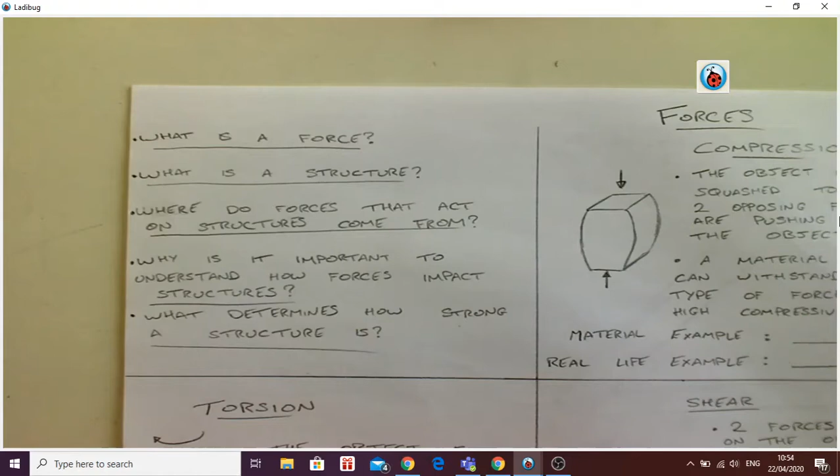So those are the 5 questions. At the end of this, you should be able to answer all of those. I want you to do that - answer all 5 questions, okay? So moving on to our first force.

My first force here is compression, right? We can see I've drawn an object - not a particular object, just a block, maybe a block of timber. The object is being squashed together from both sides. Two opposing forces are pushing against it - look at those arrows, one pushing down from the top, one from the bottom. You can see the middle of the object bulging out.

A material that can withstand this type of force has a high compressive strength. So what I want you to think of is, can you think of a material with high compressive strength - something good in compression that won't fail or break? I want you to write it out and put it in there. Secondly, think of a real life example - where in the world have you seen a material or object that has high compressive strength, or where compression is found? You can use Google, or ask your parents or someone else.

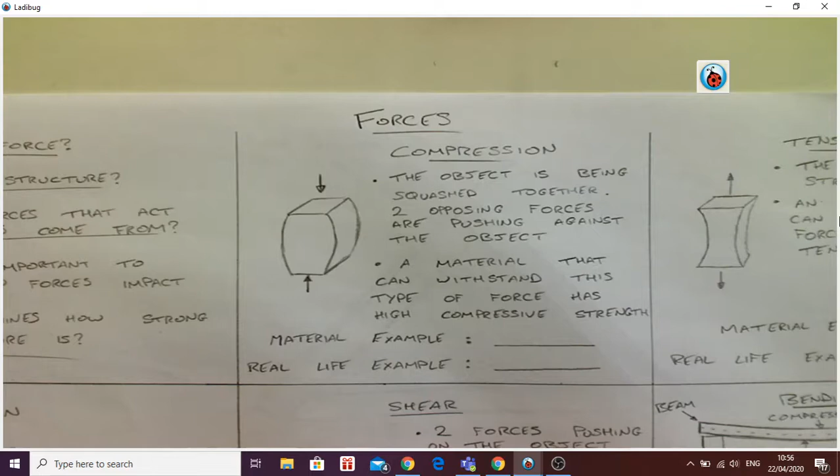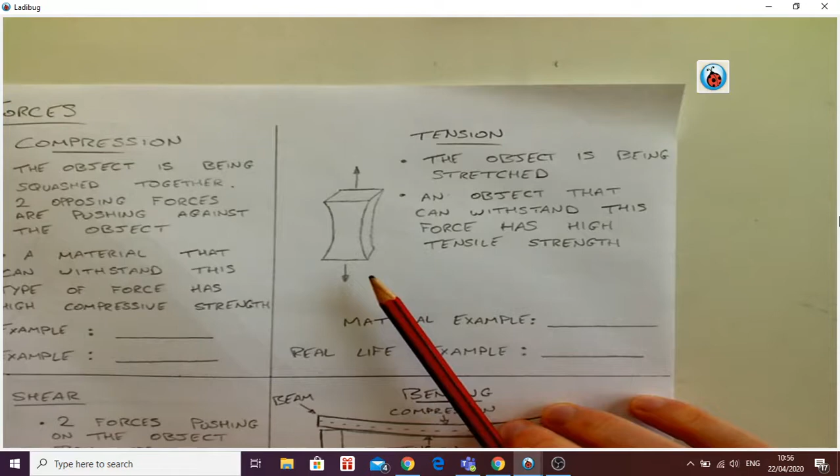That's compression. Tension is the next one. What we can see here is a similar object to the first one, except instead of pushing down on the object, it's being pulled. The object is being stretched in two different directions. An object that can withstand this force is said to have high tensile strength. I have a few ideas in my head of a material, and I'm sure you have the same ideas too. So the material is here, and again a real life example of a material that can withstand that force - something that won't snap or break when a tension force is put on it.

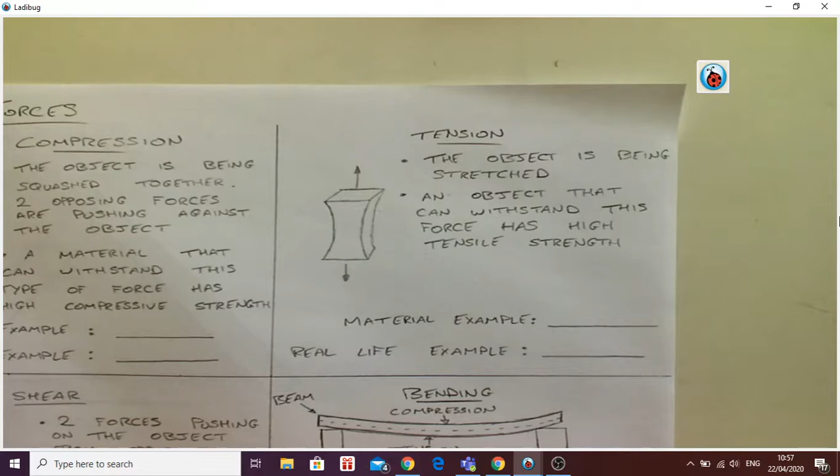Okay, moving down here to torsion. Just move my camera.

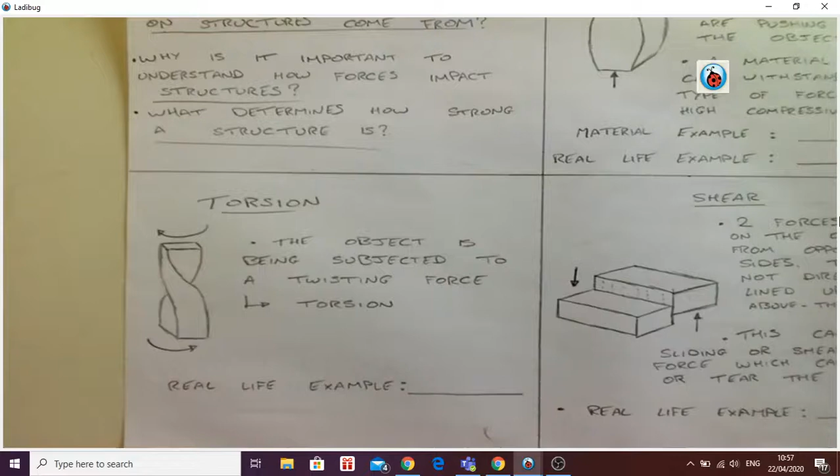This object here is clearly being twisted around. Okay, so it was originally a square object, and someone grabbed it at the top, grabbed it at the bottom, and twisted it in two different directions. So the explanation is right here: the object is being subjected to a twisting force. That is torsion.

Some of us might have heard of the word torque before. Okay, torque is a twisting force. A real life example - okay, so I'm not looking for the material here now. I'm looking for somewhere a twisting force is used.

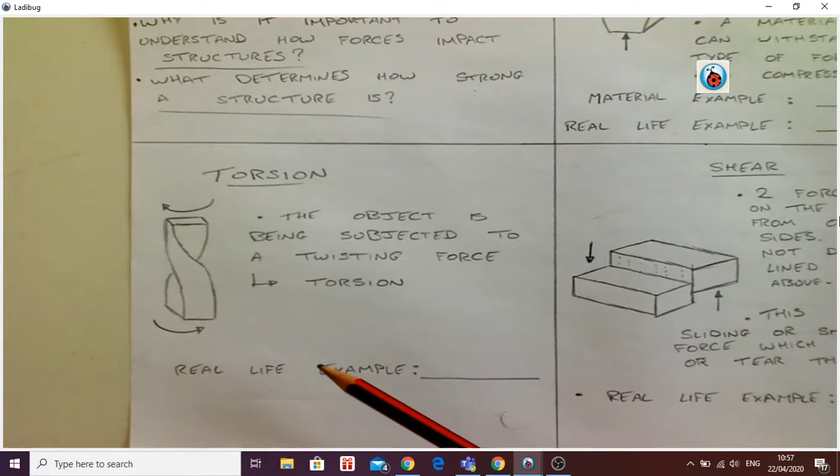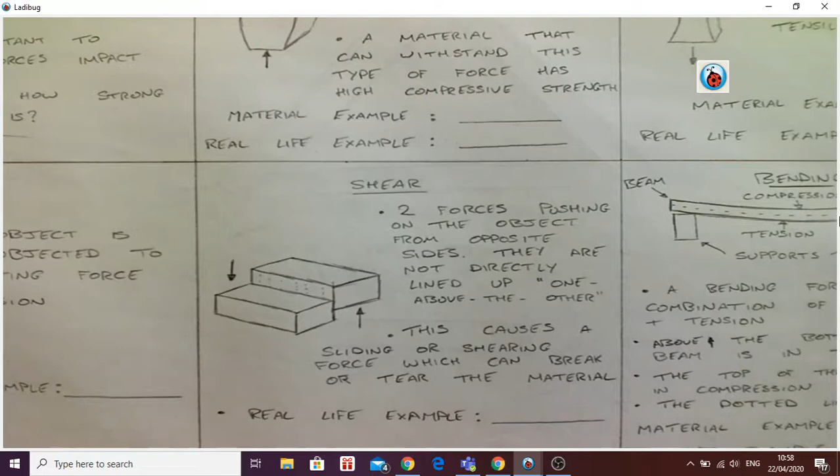Next one is shear force. Now I'm not talking about sheer as in raw strength. I'm talking about two forces pushing on the object from opposite sides. Okay, so we can see my arrows here. They are not directly one over the other. One of them is over here on the left hand side of the object, one of them is over here on the right hand side of the object.

One is pushing up from underneath and the other one is pushing down, and this caused it to break in the middle. So it broke in the middle here. This causes a sliding or shearing force which can break or tear the material.

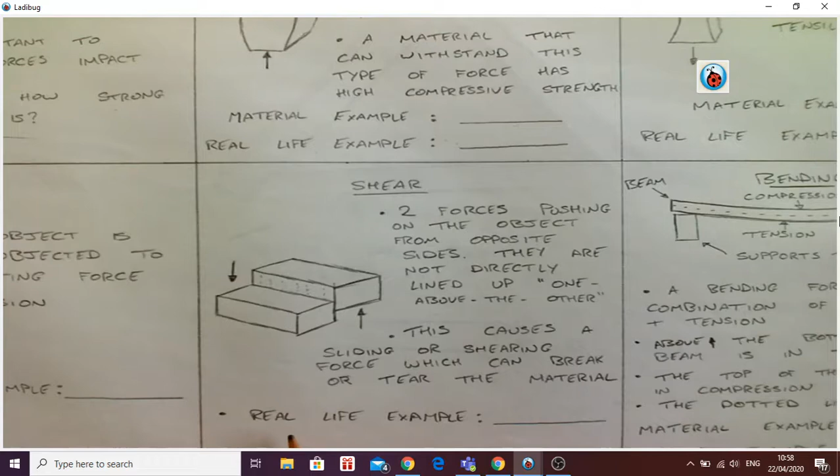Again, I have a couple of ideas in my head of real life examples. You might be able to come up with one as well. So a real life example there, take that down. Last one...

is a bending force. Okay, so in the diagram I've shown here, I have two supports, one on the left, one on the right, and I have a beam going across, bridging the gap between the two of them. Okay, so the supports aren't really anything to do with it, but the beam is what we're looking at here. So when we put a force in the middle of that beam, the top of it is said to be

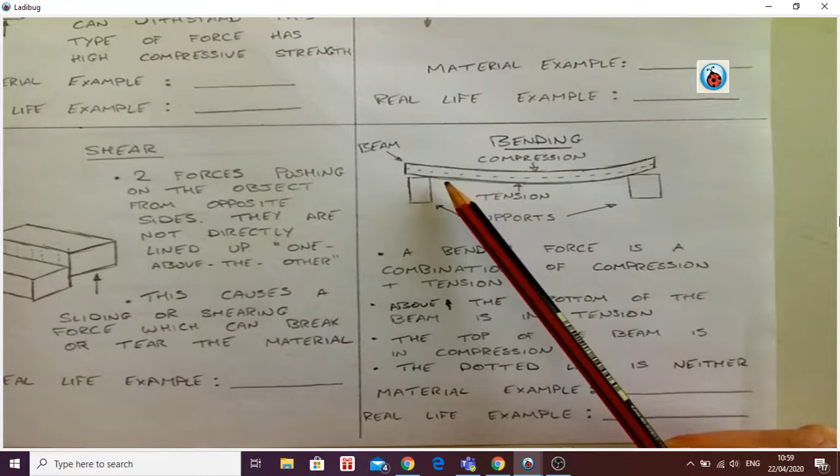in compression, and the bottom surface of that beam is said to be in tension. So all the little fibers at the bottom surface of that are being stretched to the left and to the right. Okay, so a bending force is a combination, or can be a combination, of compression and tension.

In the picture above, the bottom of the beam is said to be in tension. As I said, the fibers are being pulled to the left and the right, they're being ripped and torn, and maybe you could see, like you've seen that on a hurley, if you bend it before you do a sideline cut, so if you bend too far, it rips apart on the far side and breaks the hurley.

Whereas the side you were pushing on, the side that the compression was on, that doesn't break, that side. Okay? The top of the beam is in compression. So again, looking down at the top, there's a force acting downwards on that. It is in compression. The dotted line in the middle, however, is neither in tension or compression.

That dotted line is a neutral line. It is neither in tension or compression. So what I want for your material example here is, I want an example of a material that is able to withstand bending, something that does not bend easily. Okay, and then where in real life might you use that? Where in real life might you see this setup where you don't want this to bend?

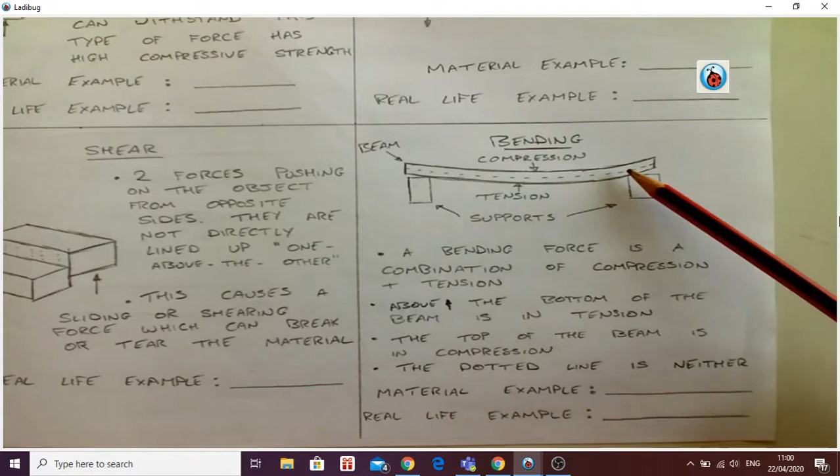Okay, that's our 5 forces. I'm going to flip the page over, and here's a little question.

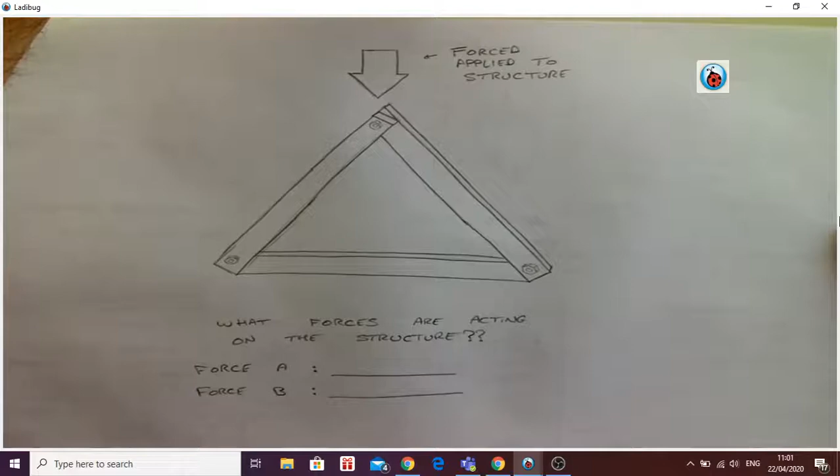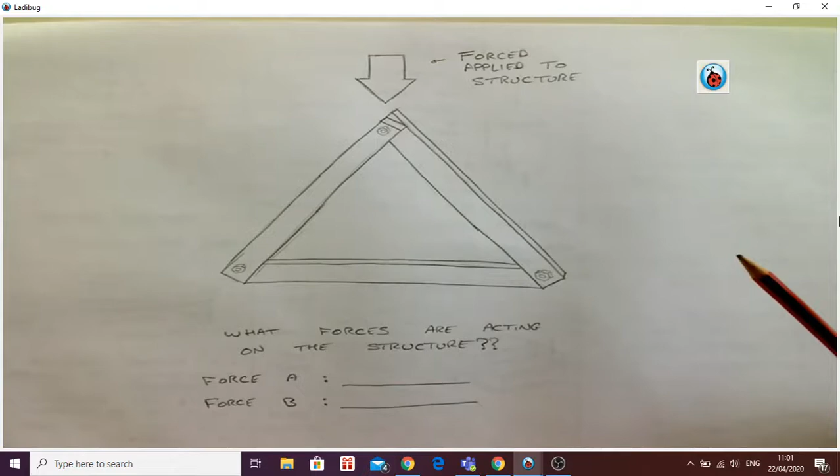Okay, so what I've drawn here now is 3 metal bars. Right, these 3 metal bars are kept together in the corners by nuts and bolts. Okay, a force is applied to the structure, pressing down on top of the top, where of the triangle, we'd say. So what I want you to do is take a stab at what forces are acting on this structure.

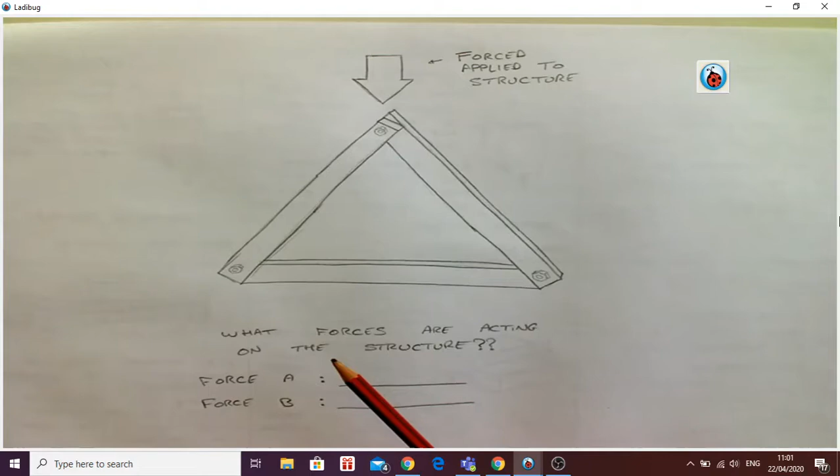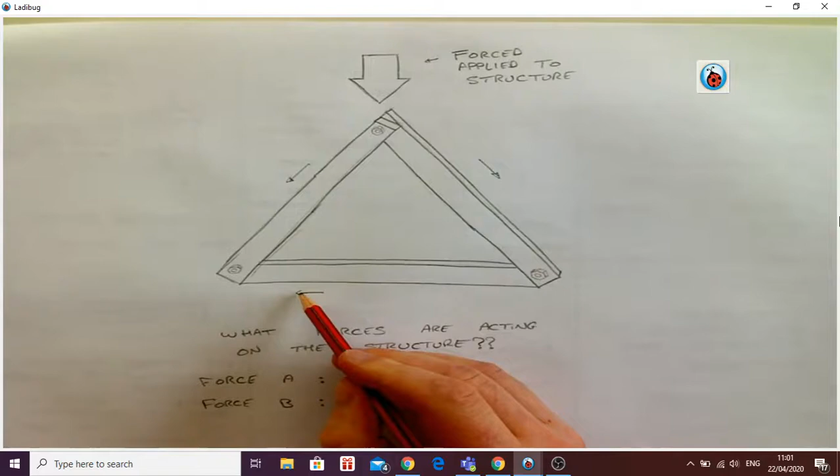Now I'll give you a hint. There's 2 of them. There's a force going in this direction, and obviously in this direction as well. And then since there's a force on this one, and these are tied together, then this has to be a force as well. So I want you to tell me, what are the forces that are applied to structure. Okay?